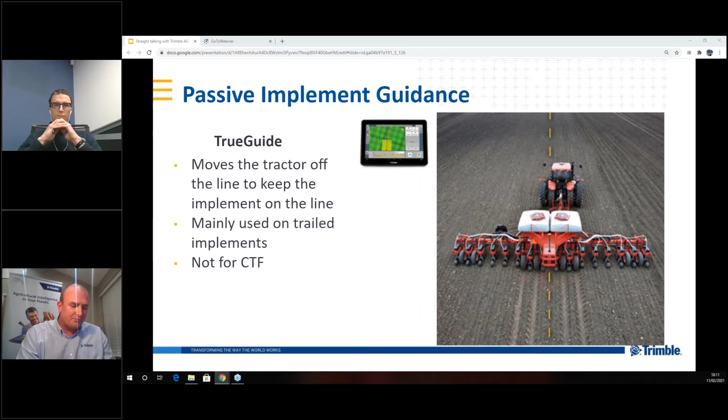So what's required for a TrueGuide passive implement steering system? This is Robert Hodgkins' setup. On the left-hand side we have our TMX-2050 display. We have a navigation controller to control the autosteer. If it's an Autopilot-ready tractor, we just need the nav controller. If it's a non-ready tractor, we could plumb it up with a hydraulic valve, or we can use the electric steering motor, so instead of controlling the steering through the hydraulics of the machine, we control it through the electric motor with the navigation controller.

Then we have our antenna on the top of the tractor, and all we add on the back is the antenna on the machine. We also add a second GPS receiver to our 2050 display, and then we have our TrueGuide done. So it's a very simple installation, but the measurements are critical.

When setting up this system over winter, and in all fairness with any steering system, measurements are critical, and it's not something we should guess. This is precision farming; we should use a tape measure. We need to know where the antenna is in relation to the fixed axle of the tractor, where the hitch is compared to the fixed axle, and where the 3-point linkage is. All these measurements are very critical to how the system performs in the field, as well as calibration. Whether it's implement steering, tractor steering, or just setting up an implement, measurements are always critical.

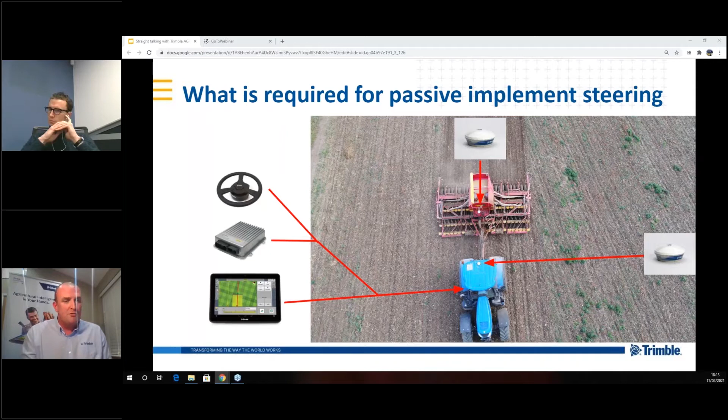So what are the benefits of True Guide? Why should we go down this route?

The benefit of the system is reduced operator fatigue. I think it's hugely important now. We touched on it in the last webinar about the weather windows getting ever shorter, and then the demand on staff to work longer hours when that window of opportunity arises.

We're looking out the window now - yes, it's nice and frosty. The sun's been shining today, but not two weeks ago my local town here was underwater pretty much for a week. So again, these windows of opportunity are getting less and less.

So the demand on staff is greater, to work longer hours. So we do reduce operator fatigue - yes, we do with steering systems, but even more so with implement steering.

It reduces overlaps and skips for the obvious reason - we're steering the implement, making sure it's exactly where it is.

We unify machinery wear. What do I mean by this? If your machine is running pre-worked down the edges, you do one pass, turn around, come back. But if you're overlapping 10 to 15 centimeters, those edges aren't going to wear the same as the center, for obvious reasons - you're running through softer soil. So when it comes to servicing and replacing the points or coulters, we tend to replace a lot. So unifying the wear makes it a lot more worthwhile.

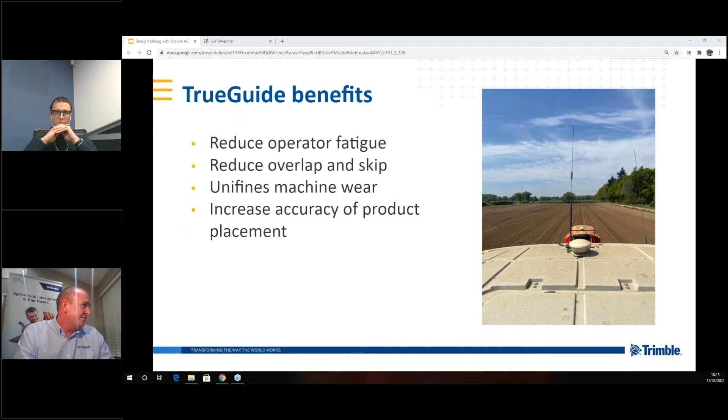My name is Rob Hodgkins. I farm in partnership with my wife Jo. Our farm name is Kapoi, a Maori word meaning food over water. We chose that because we brought a whole load of sheep genetics across from New Zealand, and I thought it was a really smart idea at the time. Over time it's just evolved to a point where no one can pronounce it, no one can spell it, and I sort of wish I'd never done it - I wish I'd just called it Rob Hodgkins Inc. or something, but it's too late to change now.

We farm around 2,500 New Zealand Romneys on about 1,000 acres of grass, and we also farm about 1,600 to 1,700 acres of arable comprising grass seed and basic cereals - no sugar beet, no fancy potatoes, just a straight cereal and pulses farm.

We got involved with Trimble a couple of years ago. I'll start right at the beginning - we were lucky enough to be invited to be an Agri-Epi Centre of Excellence farm. They were quite keen to have a mixed farm going, and they liked what we were doing in terms of regenerative agriculture. Although it's a bit of a well-worn phrase, we were using sheep in breaks as a tool to try and reduce blackgrass.

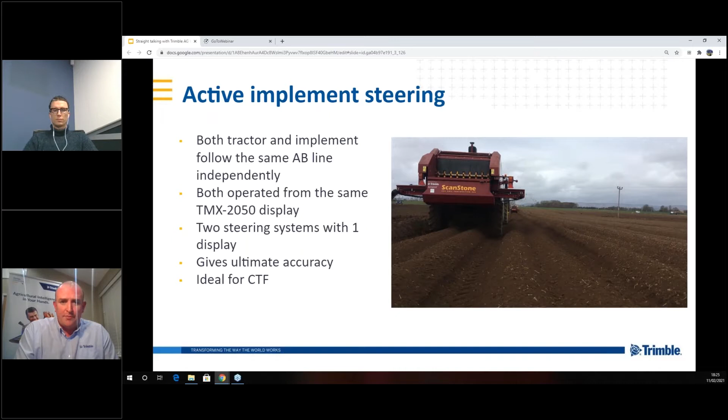So what do we need? What do we need on our machine to make this work? On the left here, we have our antenna, navigation controller, and hydraulic valve.

Now we fit that onto the machine on the back, so the implement. It's got its own navigation controller, it has its own antenna, and it's got its own hydraulic valve where we control the steering. On the right-hand side, we have another navigation controller, our TMX 2050, and an antenna on the tractor. So what we're essentially doing is we've got 2 steering systems with 1 display.

So again, you can see the difference between True Tracker, True Guide. Again, it's a nav controller, it's another steering system that we physically operate. So there's four parts.

The system calibrations of this are critical, and people who have got this system already will be going through their winter checks. But the calibrations, again, no guesswork. We've got to have it absolutely bang on. But with this, I think I would get professionals in to do it. We have a plethora of skilled professionals up and down the country among our dealers who are trained and qualified to do this. And on new installs, the calibration will be done.

So if you're having some installs done this year, I guess that'll be done by the dealer. But what I would advise is, if you've already got a True Tracker system or a steering system for that matter, every year before the season starts, you employ the services of your local Trimble dealer to come and check and recalibrate your system, and clean up the data on your display.

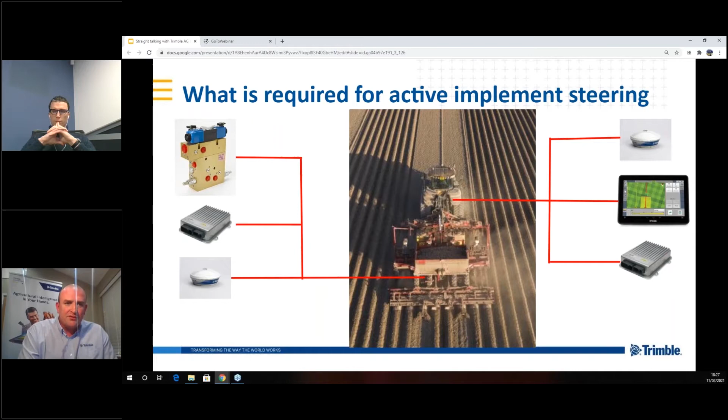So, again, what can we use it for? As I said, drilling before. Inter-row work, very important, and I've discussed this with Robert with his inter-row hoe and inter-row spraying. So we can control it with side shift on that.

Again, very popular, becoming very popular, is side shift, where essentially with a side shift system you can pick up anything with a 3-point linkage and have implement steering, whether it be a drill, a hoe, or a sprayer. We can control it. So it's quite common for planting and drilling, and it is common with CTF - controlled traffic farming - and James will discuss that a little bit later in his part.

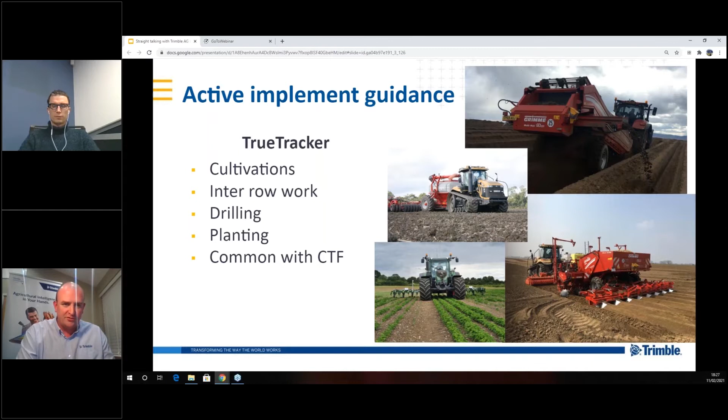So what options do we have with True Tracker? We have a lot of options. We can steer an implement, for example with coulters - that's the first one on the top left. If you've got an implement with no steering on it at all, this is where this comes in. We could find somebody who has a set of steering coulters, engage them in the ground, and physically steer them to steer the machine on the back. Some people have done it on ridges, on different pieces of equipment.

We can also do tongue steering and articulated steer, but by far the most popular in the UK and Ireland, and probably across Europe, is load-bearing wheels, where the steering is already installed on the implement, and we can overlay our system onto that - also the side shift system, which is very popular in the UK.

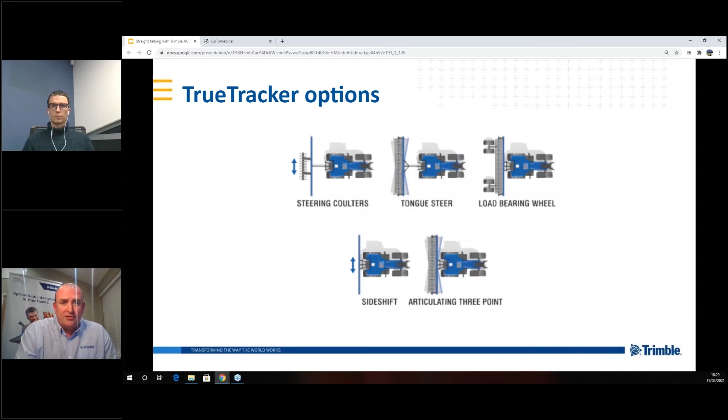Again, we're doing systems over in Ireland now. We've done a lot of systems in Ireland and a lot in the UK, because it's a quick solution for controlling any 3-point link machine, and it's very easy - a one-stop shop. You pick it up and away you go. Hervé will talk about this a little bit further.

So again, we talk about the benefits. They're much the same as TrueGuide, but on a more critical scale, should we say. It reduces operator fatigue and improves efficiency for much the same reasons. The demand on the operator is higher, but with destoning and soil uniformity across the field, it's the destoner driver who always gets it in the neck for not having enough soil to cover the potatoes. So yeah, it's quite key, I think, to get that right.

Repeatable tractor and implement accuracy keeps the traffic in lanes, especially on controlled traffic. We reduce crop damage with the tractor and the implement - the tractor's not moving off the trafficking lanes, it's going straight down, as does the implement. It improves operator efficiency, so he doesn't need to worry about where the drill is on the back, where the destoner is, or the planter, or where the tractor's going. What he's got to worry about is the operation - is it putting enough seed down, is it blocked or not blocked, is my sprayer working as it should do. So he can concentrate more on the operation of the implement rather than where the implement's going.

We also improve accuracy on difficult terrain. On bank sides, obviously it works really, really well - you can see a massive improvement there. But even on the flat, it really does move. So with all this in mind, we caught up with James Peck from PX Farm, Managing Director at PX Farm, earlier in the week. We'll go over to James now, and he'll give us a brief overview of his farming enterprise.

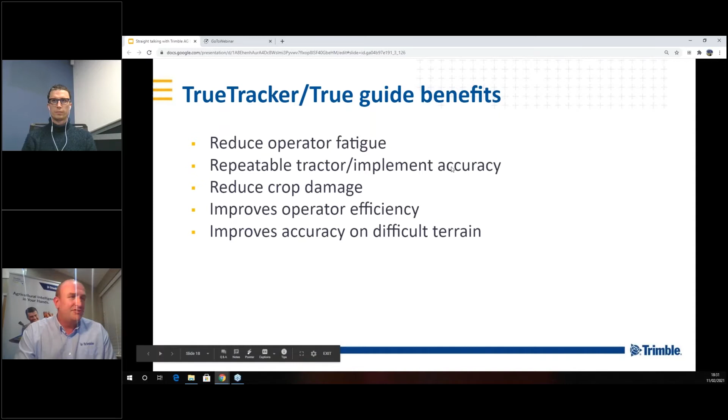Everybody, James Peck from PX Farms, managing the business just outside Cambridge. Started in 2003, we're farming just shy of 12,000 acres, currently on a combinable, sugar beet and potato operation, and soon to be moving back to combinable. I came about, as many people did, in the late 1990s, early 2000s, with a basic form of steering, and at that time the platforms we were using were John Deere related due to the type of machinery we had.

During 2010, I was very lucky to get a Nuffield scholarship, which took me around the world, and my chosen subject became controlled traffic farming. To do that, I needed to fully embrace an RTK network of precision steering, working down to a 1 inch basis of repeatability. So I went around the world looking at different systems to see what would suit us. I was lucky that RTK Farming started up in the area, putting up base stations predominantly around Cambridge and in expanding areas. We now also farm in Bedfordshire, Norfolk, and Cambridgeshire, so we needed networks that we could bolt onto rather than having our own individual systems.

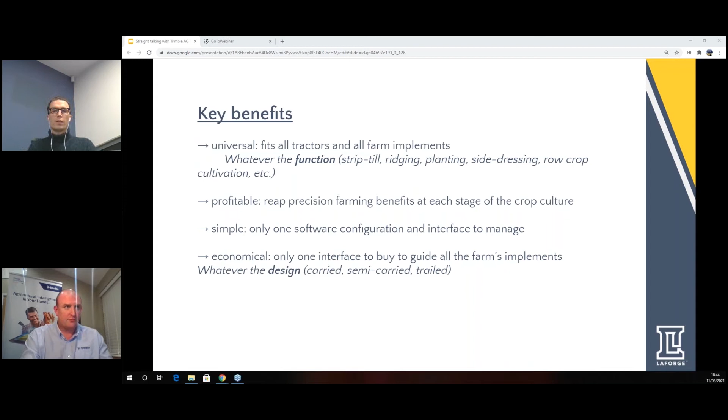So what are the main applications for DynaTrac? As of today, in our customer portfolio, we can consider that we have many people focused on high value crops, vegetable producers, potatoes, sugar beets, where accuracy is really beneficial, and because you have lots of operations. We also have big farms.

When we started in the US and still there, we have many customers having large corn and soybean farms in the Midwest. And finally, we've got organic customers where accuracy is critical, because they do need row crop cultivation, and they need this to be as accurate as possible to optimize yield and control labor costs for weeding. So now we can take you through a 2-minute video explaining how the DynaTrac operates.

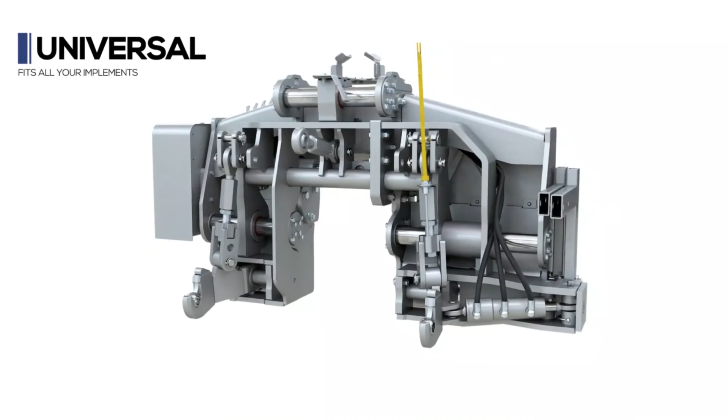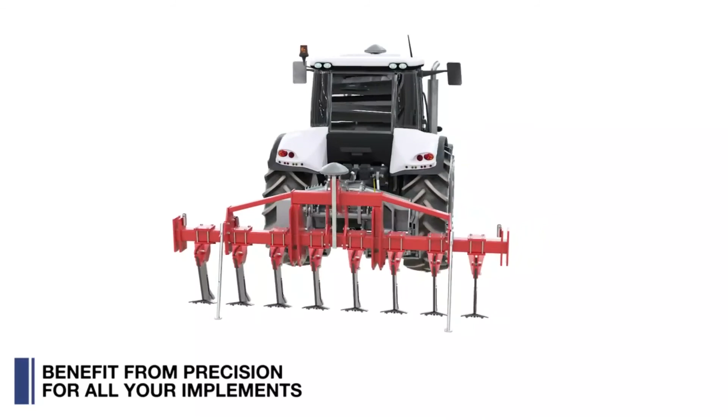As a universal implement guidance interface, the DynaTrac accommodates all kinds of implements. It is simple for all operators to use at each stage of different crops. Universal, it positions all implements with high accuracy. GPS guidance lines generated during seedbed preparation or planting are used as a reference through harvest.

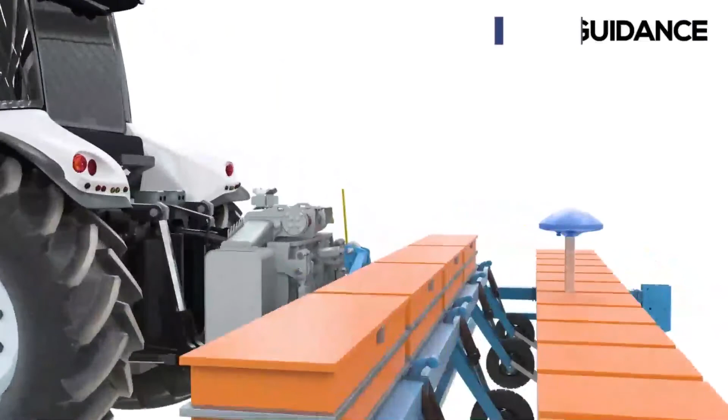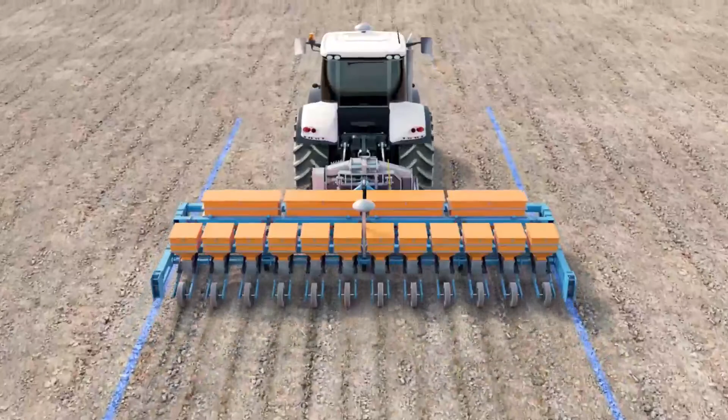With a GPS guidance system using a receiver on the implement and one on the tractor, DynaTrac constantly corrects the implement position to keep it on the right path. In a slope or a curve, DynaTrac adjusts its position to keep the implement in line with the tractor. Even in a flat field, an implement can drift if the soil is harder on one side or if the implement is not perfectly symmetrical.

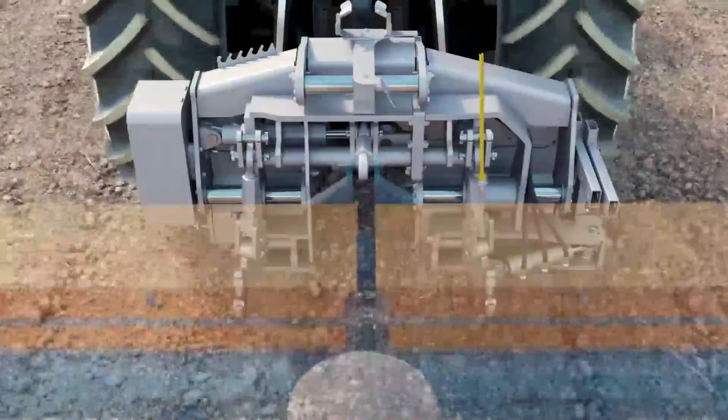For carried implements, contrary to rigid interfaces, the float feature of the arms allows an accurate tracking of the implement behind the tractor without generating influences on the implement position from tractor corrections. DynaTrac's high-quality manufacturing warrants its reliability. Its exclusive design and functionality reduces implement wear and increases accuracy of both the tractor and implement. For all farmers looking at working accurately, DynaTrac is the efficient and profitable solution.

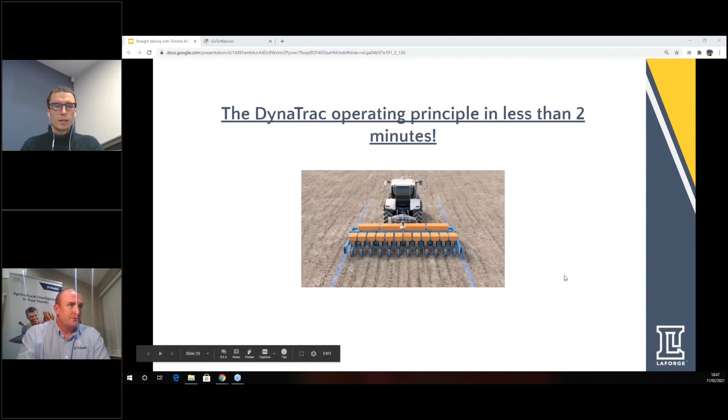And after that, we may have one more video, just 15 minutes in the field, if you have this one, Lee, of a UK customer using DynaTrac and TrueTracker.

Okay, so then we can switch directly to the next slide, which is what does make the DynaTrac unique? We've been through that in the video, but the key point to have in mind is that contrary to other side shift interfaces, DynaTrac is the only one which features this free-sway capability, which you can see around the number 2 on the picture with the red arrows. So the hooks can move sideways, the arms can move sideways. That's a patented feature which allows to decouple the implement motion from the tractor when shifting.

So what are the benefits? First, it avoids side load on the implements. You have no damage to the implement, nor implement getting locked in the ground when shifting when there is correction. Secondly, you'll get a much better steering response of the tractor and better handling of slopes or curves than with a rigid version. Because as correction is smooth, you don't have the system which keeps bouncing from one side to the other, like we would have with a rigid system.

And finally, you get perfect implement trailing, which means tractor positioning correction does not interfere with implement positioning correction and vice versa. And for people using heavy implements, as Lee mentioned, sometimes you've got a big potato planter. These are heavy, and when you try to do active guidance with a rigid interface, when you try moving the implement, eventually you do not move the implement. You are just pushing the tractor on the opposite side of the correction.